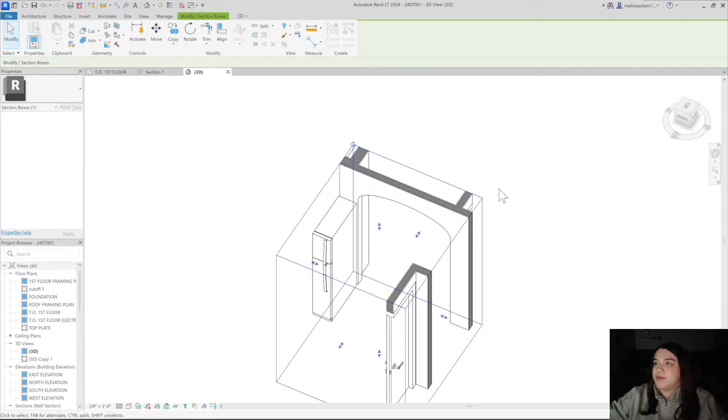So if I go to this section, this is really where I was exploring the idea of doing a faux cathedral within this space, and then also doing like a vaulted entryway. So if I take a section box, I can look at this space in 3D and crop to it. So this whole entry space, I was also considering doing like a complete vaulted ceiling, not circular, but an arched ceiling in this entire entryway.

If we go back to this section, this is 6 feet over here, so this is complete space that could be finished. It also could be unfinished. So we're definitely probably going to have two plan options with this one. We're going to have one plan option where it's not a cathedral ceiling, it's just a flat ceiling, and all of this is just attic space with an attic drop down like over here.

In our mid-tier higher level stock plan, for people who are looking for more square footage and a little bit more of a high-end finished look, we will be including the cathedral ceiling as a touch. We'll be including the finished area on the second floor, and we'll be adding stairs over here. So that's just a little bit about our thought process.

This will be the first stock floor plan that we complete and bring to life, the first one that will be on our website. I'm really hoping in a few months that once we get things up and going with the residential design and offering our design services and our stock plans, that we're able to bring in some cash flow and we can actually purchase Lumion. I love Lumion. I've used it at all my past jobs.

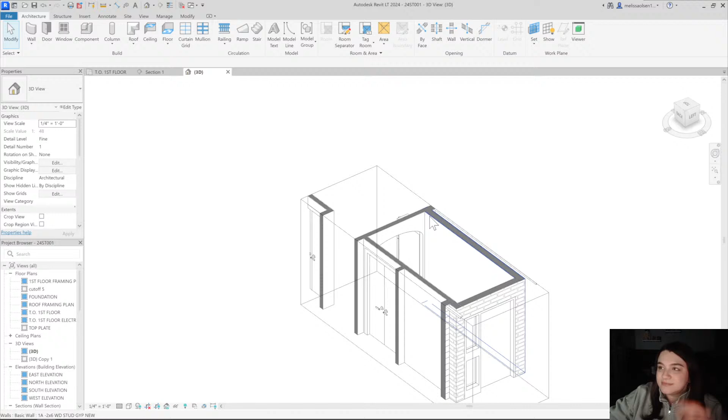Now your girl's on her own, so she's gotta pick and choose the programs here. So it hasn't been top priority, but I definitely would love to get our stock plans rendered in Lumion eventually when we are there in our process of just developing, honestly, everything. It's one step at a time. So this is what we are working with right now.

It really took a long time last week with the dormer because I really was intentional with this section. I sent out in my newsletter a little bit of a breakdown about last week's Model with Mel, just because I wanted it to be not just let's throw this dormer on and now you know how to do a dormer in Revit. I took you through the actual step-by-step of here is my thought process when I'm creating roofs and creating dormers. It's not just let's throw a dormer here.

What can the space be? And you really have to take a section and look at it and understand it in this way. Revit is invaluable to me just by the fact that I can draw something and immediately see a section of it and start manipulating it in section, in 3D, and all of those ways, because you really just get a feel and understanding for the design and any potential design issues or conflicts.

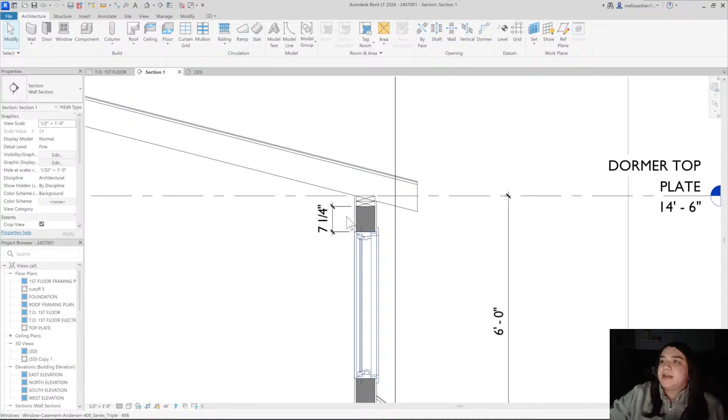And while I was doing this and I took the section, it really allowed me to see, oh, this could be a perfect opportunity for a faux cathedral in this ceiling, really elevate the space. Possible skylights to kitchen. I write notes to myself during design. So this is a whole process, making sure the windows are going to fit, making sure there's enough room for a header, placing our top plates to make sure that what we're doing is indeed going to be buildable.

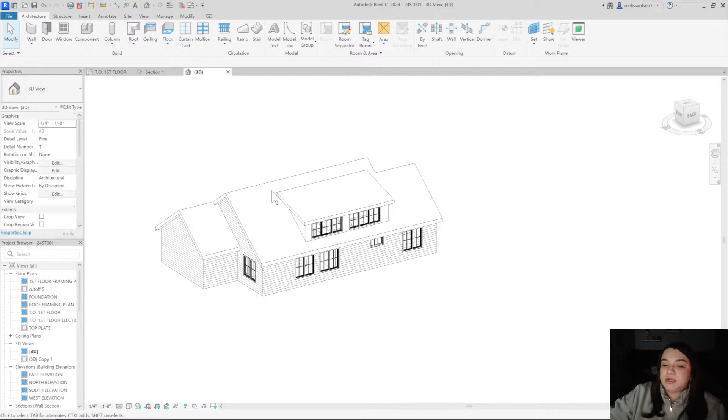I don't like to necessarily design something unless I know it's going to be able to be constructed. That's just the way that I have been taught, to always be thinking about what is this actually going to look like when it's built. I think that having a basic understanding of wood frame construction is so crucial when you are using Revit, just because there's so much that we want to bring to life within this program, and the more we understand, the more accurate it can be.

So I think what I'm going to do is I'm going to go around and I'm going to place some windows. Which ones are these? I can't even really see. They look like picture windows. Casement. They're casement windows, which means that they open from the side, which I don't mind. I'm trying to decide if I want to add any mullions or anything. These are 4-8 by 5. So they're 4-8 tall and 5 wide because they're doubles.

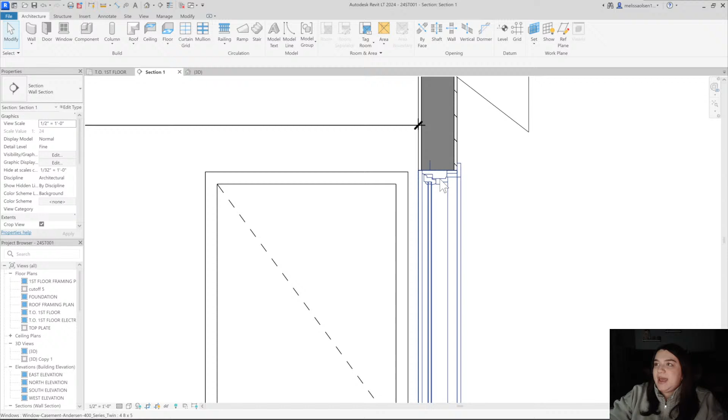I don't think I really necessarily placed a height. So the sill height's around 2.2. And actually the head of the window is matching where the head of the door is. So it ended up working out pretty successfully in where I placed these. I'm just going to click on a few of them, and all the sill heights are set to be the same here. And I'm pretty sure when I aligned this in elevation.

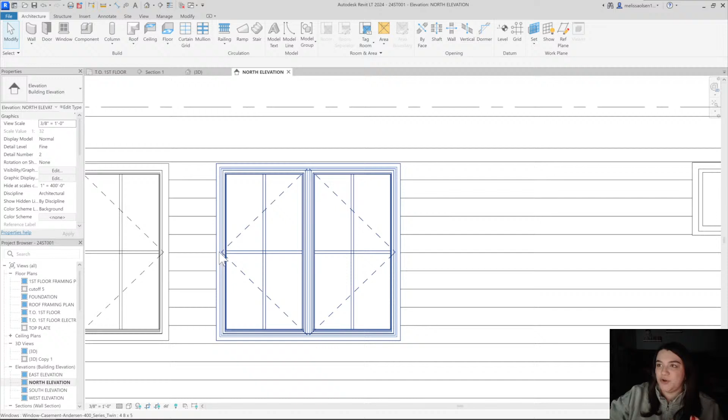I'm going to just select the elevation. And I just want to make sure that I'm doing what I need to do for these windows. So we're going to put a window here in the bathroom, and we have it centered on this window. And then this triple window should be centered on this double window, which it is. And you can see when we're in our 2D elevation that we can start to see these dashed lines, and that represents how it's going to open. So the hinge is on the side where the lines meet, and then this is the way that it opens.

When we're in 3D, obviously we don't see that. It's a 2D depiction that's available for us. And then over here I changed the detail level to coarse, so you can see that if I change it to be coarse, it just shows less and less detail. This is called your detail level, and I always like it to be set to fine, just so that we're seeing as much of the true elements as we can. You'll notice that when I switched to medium, these mullions just became 2D lines instead of showing up like a physical property with a thickness to it.

I want to see if I have casement set up. So these are from the Andersen Windows website. It's a window and door company. You could just Google them. They have a whole BIM library.

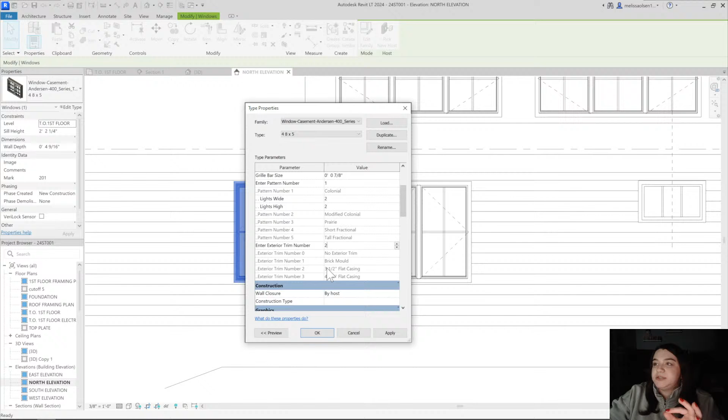It's where I have all of my windows downloaded and saved from because they're phenomenal families to work with, and they have just so many windows and doors and all of these things. So here you can actually select an exterior trim number. So right now they don't have any trim assigned to them. I'm going to automatically go in and add trim to them. I'm going to pick number 2. I'm going to do the 3.5 flat casing. So I'm going to hit OK, and what's going to happen is it's going to go through, it's going to change all of the windows throughout the entire project and add casing to them.

Before I was using Andersen Windows, before I really knew processes and things that worked well, I was modeling casing with like a wall, like cutting out the wall and making it trim, or I was modeling it in place as an element and then kind of like applying it or attaching it to the wall as a wall-based element, which was a whole process to create, and it worked for what I needed it to do.

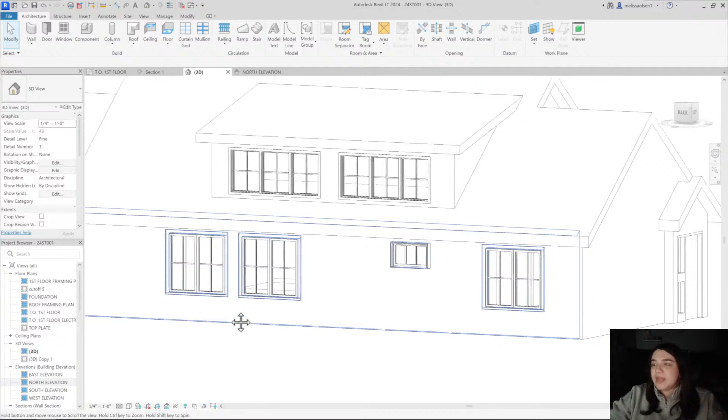But once I started using Andersen Windows and was able to look at the capabilities that the families offer you, it has changed the game for me. It's made a lot of things easier with windows and doors, just the casement thing alone, the ability to change all these mullions. So I do like the way this looks traditionally, but I think I'm going to go for a little bit of something different. I want to switch it up.

You can change the grille bar size. You can enter in the pattern number and then lights wide, lights high. So right now it's set to colonial, which is just the standard, you know, down the center over, and we're doing 2x2. So if we upped this, we could do 4x4. I'm just going to hit apply so we can just see what that's changing.

It's going to divide the, I got a piece of hair on my hands.

It's going to divide the windows into 4x4s. Yeah, see, so 4 this way and 4 this way. That's what this means. And I'm going to put this back. I'm going to put this to 2 again. I'm going to change the pattern number. A modified colonial. So let's just go through some of these different types.

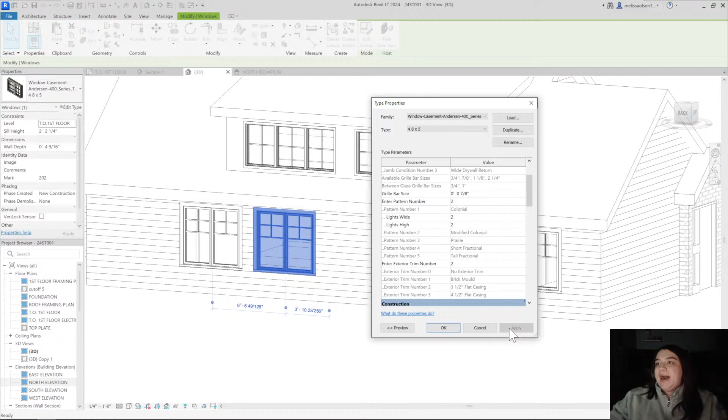We started off with colonial. We are now going to see what a modified colonial looks like. It does take a little bit of time for Revit to think through these changes. So modified colonial is just the top half. And we're going to see what prairie is.

There's all of these different terminologies that we don't even realize exist within architecture. Like colonial, modified colonial, prairie, short fractional, tall fractional. I had never heard any of these terms before working in practice. So if you don't know or have never heard these terms before, do not fret. It's normal. You will learn these things as you go.

So this is prairie. I want to see what short fractional and tall fractional is, and then we'll pick one and we'll move on. I thought I would like prairie, but I don't know if I do. And I don't know if prairie would necessarily work with a 1x1. I'm not really sure. I don't think it would, but so short fractional is just a little bit of mullions at the top,

and for the last one, we're going to see what tall fractional is for this window family. Tall fractional, I'm assuming, is just going to be a taller version of this. Again, if you've never heard these terms before to describe windows, you're not alone. So modified colonial and tall fractional are pretty similar. Tall fractional, they just don't have like a double horizontal bar.

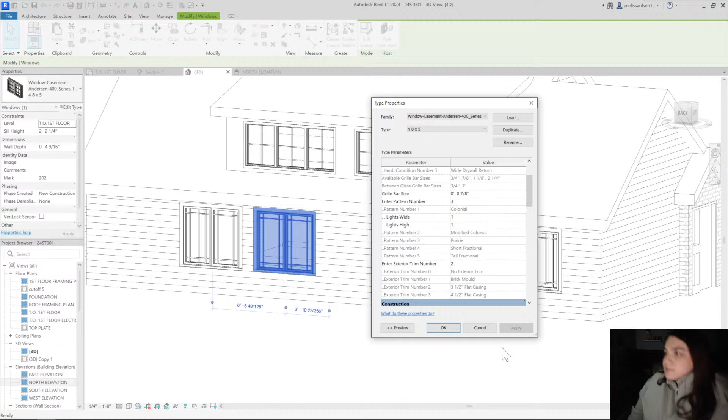What I'm going to do for this project, I think I want to try prairie, but I want to see what it looks like if it's just one. I don't even really know if that's possible. I will just test out different things, see how they look, see how they feel. This is all part of the process for me. I didn't think that the prairie was going to change with only one, and it didn't. I thought I was going to want to do prairie, but I don't want to do prairie. I'm gonna change it back to...

I'm actually thinking I want to do something different for this. I always do colonial, it's like a habit. So I feel like I want to try modified colonial.

I'm going to change this. If I keep it at 1, I think it's still going to do 2. I always get a little confused on what it's actually going to show up as, if one of these things is even a possibility. Like here with the prairie, it gave us the option of doing 1, but it didn't actually produce 1. So this one is just horizontal lines, which actually does make sense.

It's interesting that the dash lines actually changed. I didn't realize we were in 3D before, so I didn't know that was changing. I don't really know why that's happening. So for modified colonial, I'm going to put the 2 lights back in again. I'm just going to take a look at how that looks and feels.

It just feels like too busy with this. There was a third option we did, short fractional or tall fractional. I think I want to try tall fractional just because it's similar to this, but it felt like there was a little bit less going on up above.

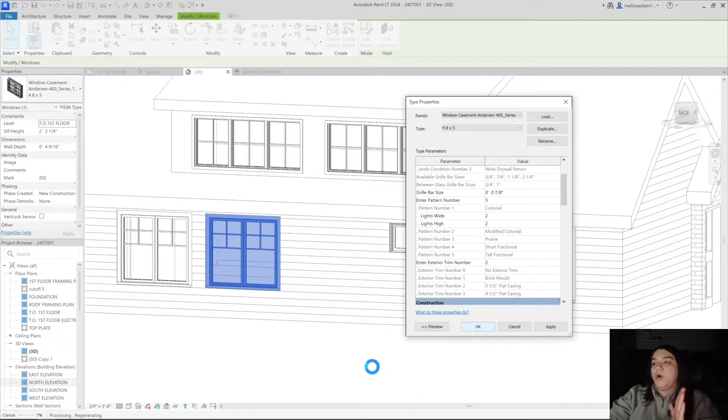I think it's just like 1 vertical, 1 horizontal for the fractional. And I think I definitely like this the best.

I feel like these windows are so big that breaking them up with this type of grill pattern works really well. It also feels like it's working really well with this grill pattern on this window in the bathroom. And up here as well, because these are smaller windows, they just have the full cross mullion, whatever you want to call it, the colonial mullion. So definitely going to keep that.

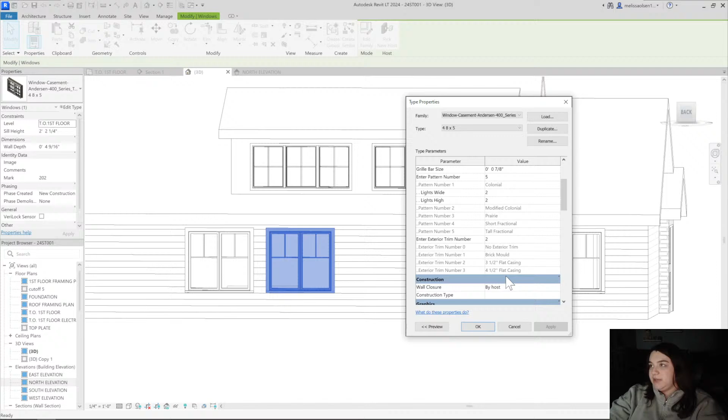I don't know why when I changed it, it went from being a middle center hinge to an up above hinge. I wonder if I change it back to colonial, if that will affect those 2D lines. I'm just curious, I'm going to keep it as it is now, but I'm curious how those detail lines, the dashed lines, change. Yeah, so it does change them, which is pretty interesting to me.

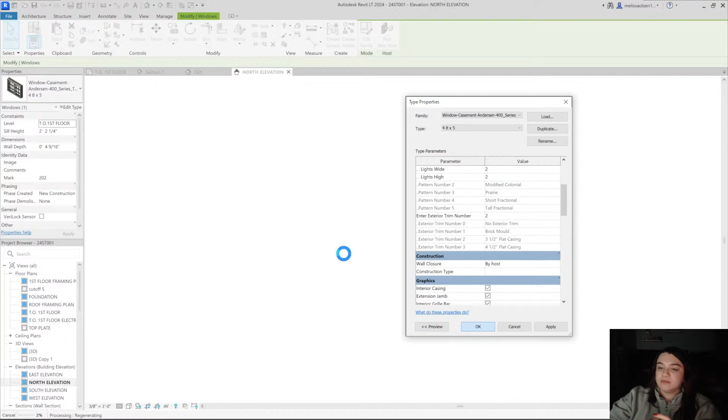I'm just going to change this back to tall fractional. And it's all right that the 2D line's changing, I'm really going to be focused on this in 3D anyways, so it'll be okay. An error occurred.

Cancel. Interesting that an error occurred. Okay, we're going to enter in the pattern number again. We're going to do 5, 5. I don't really know why it's not working.

Alright, so it did change. Again, those 2D lines look a little bit funky in 2D. Honestly, I could just change the family, it's probably just something within the family that's broken or not right, but it's fine. We're going to look at it in 3D. It looks beautiful, so we're going to keep going.

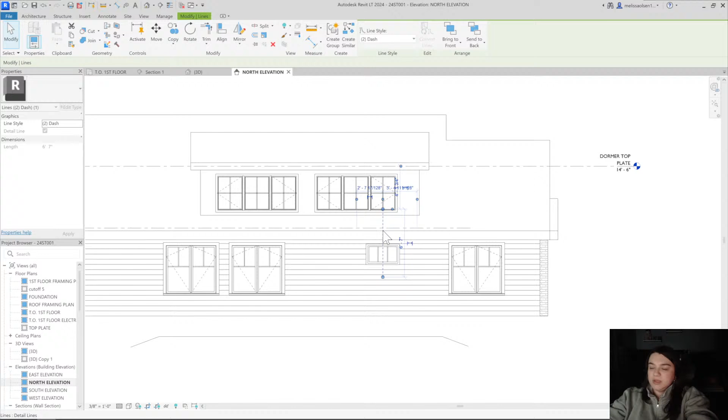I want to develop this roof. I think I want this to be metal and the rest to be shingle.

Let's finish placing some windows though, because I feel like I'm just all over the place. So I need to figure out where else I want some windows. Let's go to some window families.

I want to do a triple, so I'm going to type in triple. I have Casement Andersen triple, a 10x6. I could just change it if I want to, but I'm just going to plop it in, see how it looks. This is like a big living room space, so I feel like I definitely want something centered here. For sure.

Yeah, so the sill height obviously needs to match 2, 2 1/4, so I'm just going to copy that over there. I'm going to copy that over here. Ooh, this should be 2 feet. All right.

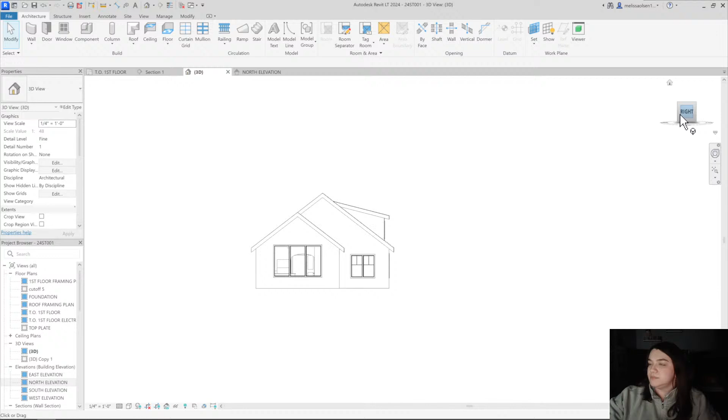So this is just in general a taller window. The sill height is in fact the same, but the head height is obviously going to be different because this is a 10-foot wide by 6-foot 6 tall window. I do really like the tall window here because this feels like a separate element.

There is going to be mullions on this, so let's go in and add those. Let's add the trim, number 2. Let's go up here, add some lights. Let's do 2 by 2, and let's set this to tall fractional.

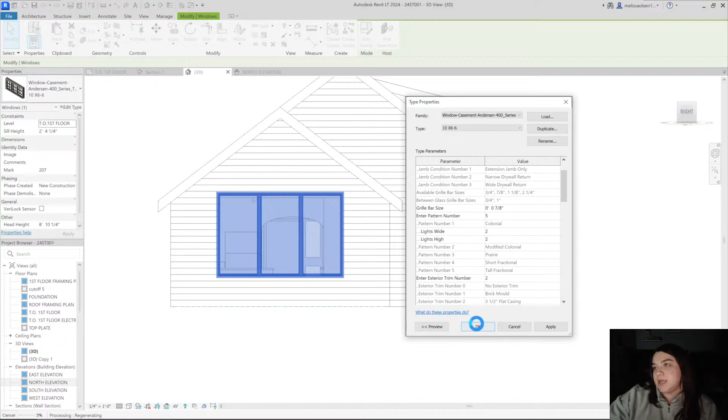Some of the projects, I feel like if they're more modern, they require the clean, normal look. It really just determines the style of the building, the aesthetic you're trying to go for. And I feel like windows are one of those things that you can even ask the client per project, hey, what window type do you prefer? Do you like this? Do you not like this? And they can make a decision themselves at that point on what style window they prefer.

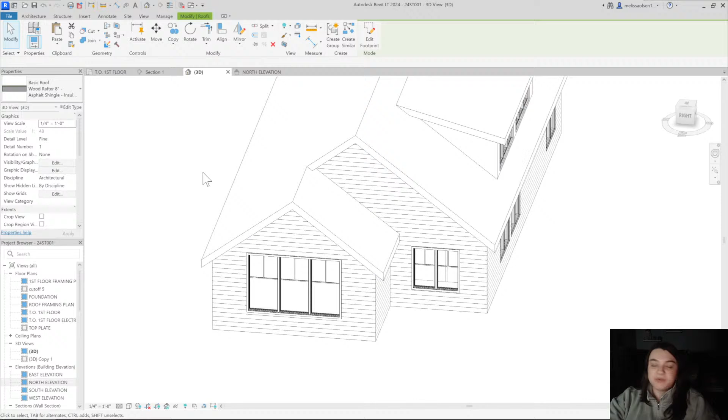So this would be a perfect opportunity in this space to have its own cathedral moment, a true cathedral, where we are actually framing the ceiling to the roof rafters. I'm calling this a faux cathedral because one side of the cathedral in the kitchen would be taking the angle of the overall roof rafter on the left, but on the right we would create a faux rafter on the inside to create the faux cathedral look. I hope that distinction makes sense. This is like a true cathedral space, whereas on the inside it would be a faux cathedral.

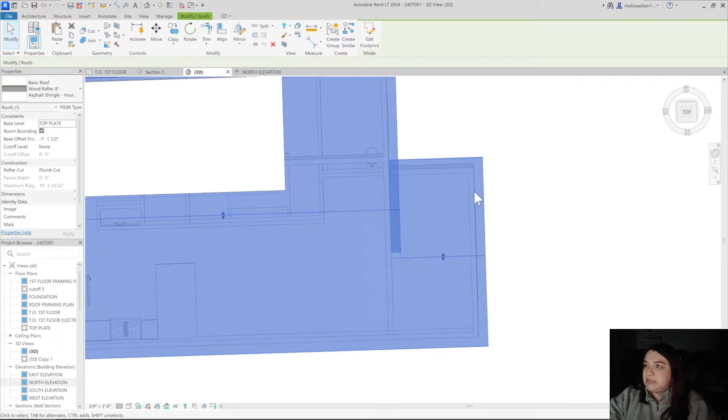I will definitely have to investigate the interior space. We don't have any floors in right now, so it might be a little hard to see. But I think it could be interesting to have a faux cathedral over here and maybe stop past the dining room chairs, so when you first enter it opens into that cathedral ceiling, then flat ceiling, flat ceiling, flat ceiling, and then it opens up into a cathedral ceiling. It might be a little awkward though, because this whole space is like living room and this would just be a cathedral, so it might not be worth it. I also feel like having more than one cathedral ceiling space in this area would take away from the cathedral itself, having two of them. One feels more intentional, but there's definitely two different options for the location.

Like I said, the kitchen is where I'm going to put it, but you could also put it down here, and maybe even this part would be a true cathedral and then you extend it back to this portion so the space actually feels like a dedicated living room space. If I were to put a dashed line here and change this ceiling into cathedral, I feel like that ceiling change alone really allows a space to feel different even though it's one room and it's open concept.

A lot of open concept plans feel really inviting and they're really popular. A way for you to distinguish the spaces and zones of the house is to really utilize the ceilings. I feel like a lot of times in design, especially residential projects, we're not always thinking about the ceilings, we're not always thinking in section. So that's something I always want to be doing.

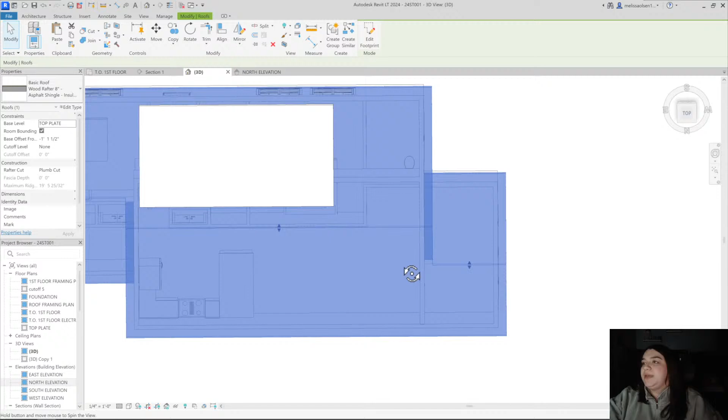I feel like it could be a really good opportunity to have a cathedral ceiling in this whole area, if we go back to the floor plan, to distinguish the two areas - distinguify, that's not a word. I also feel like it could still be a really good idea to have that cathedral on this side. I do want to finish placing the windows. I do feel like this mass feels good having the head height bump up here because it's sort of in its own little world.

So if I go to the first floor plan, I'm just going to go in and add a couple more of these double hungs that we're already using. I want this to be where the dining room is, so I'm going to place a window here in this zone.

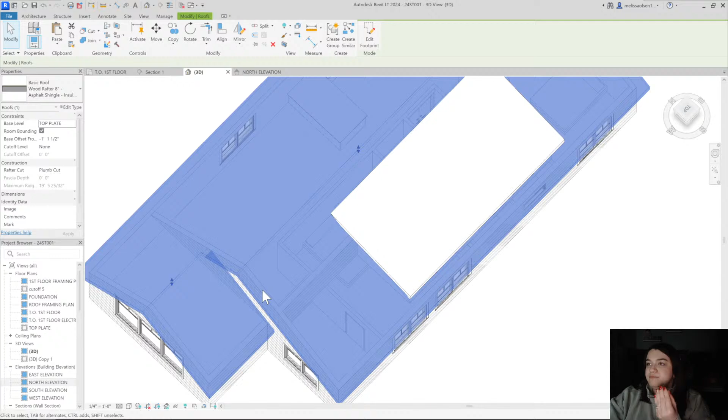One of the things to consider when talking about doing a cathedral for this space is the stairs probably have to be here, so how does that work? If you're going to build the cathedral to this front roof slope and extend that back into the building, like we were talking about doing in the kitchen, how does that work with stairs? It really doesn't, because you're creating a head height down here that you can't get past. So there's a lot to consider. If you're not using the second floor as a finished area and you're just going to use an attic pull down to get up there, perfect - you can make this whole area a cathedral and push it back, because you won't need to put stairs here.

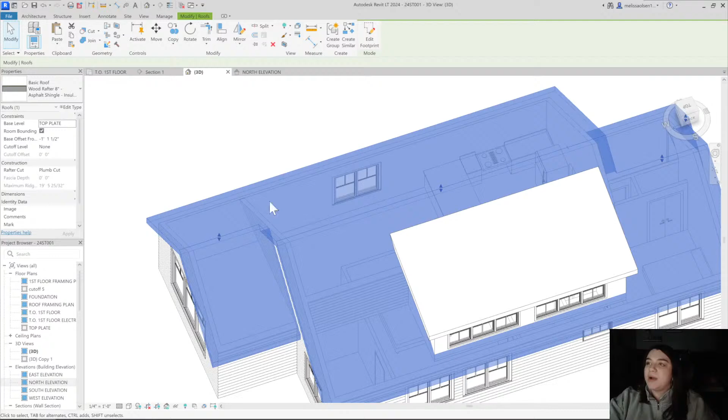But in the event that this is a finished second floor and somebody does want to utilize that, you probably wouldn't want a cathedral ceiling here, because you're going to want the stairs to go up there. And this roof would continue back on the inside.

We'd have those faux rafters to carry the shape of this roof inside here in this space. I hope that makes sense. I know I'm talking in 3D and switching views a lot, but I really like to talk through the design process, what I'm thinking, how I'm visualizing this space on the inside, how I'm thinking if it's going to work.

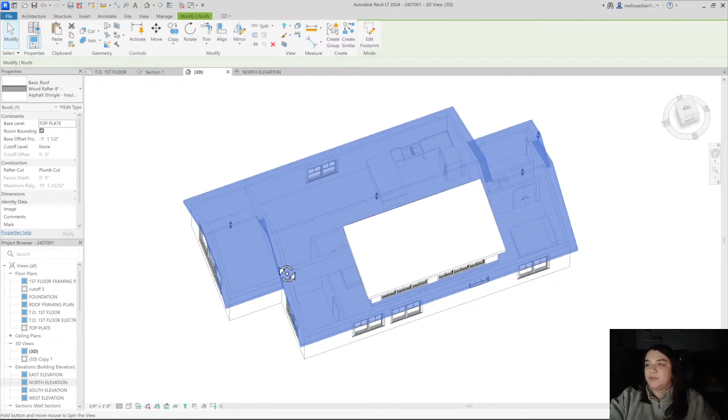There's obviously so many different variables. This isn't for a specific client, so there's no one saying I would prefer this over this. It's just me deciding what I want to do for every project, and also slightly changing some of the projects to make them more affordable or more higher end. So like having a lower, more affordable version of this plan versus more of a higher end, more construction costs to the project, those two options for the same floor plan. There's definitely a lot of different things I can do, and I just have to figure out what the best thing is.

I think I'm going to place 2 windows here in this space.

I gotta flip all these windows because they are not showing the casing on the outside. So I'm just flipping all the windows with the little arrow. The casing's right here on the outside.

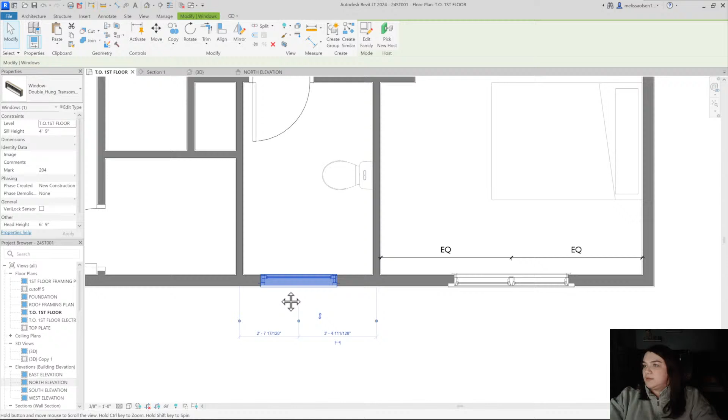This one I don't think has casing, so let's just go in and add that to this. Okay, this is a little bit different. Flat casing for this one's number 5. So we're just gonna update that there.

We're definitely going to want a window by the sink. So I'm going to do create similar, but I'm also going to pick a different one.

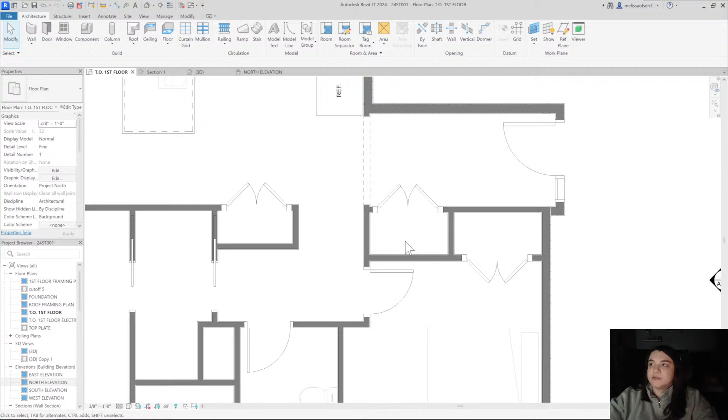So the range is actually here. The sink is here. That's something that changed in the floor plan since I talked to Emily. We also changed around this. This is a closet for this room. This is a closet for when you walk in.

I'm not entirely sure again what we're going to do with this space. If we're going to keep this we're gonna make a sort of division here. I'm just using this right now as a guideline, as a reference for this, to divide this space, but I'm not sure if it's gonna be a cathedral ceiling. I don't really know what I think right now. I think I just need to model some stairs and see how that's gonna look.

So I have to put in a second floor here. I'm gonna put in a floor so I can create a finished floor height and I can get some stairs. Do I want to do that? Or do I want to work on the exterior? So many different things I can do right now. I feel like the exterior should be my top priority.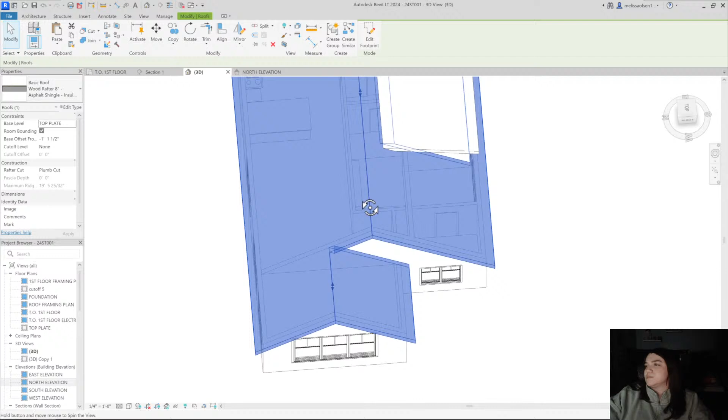I don't really picture stairs going anywhere else. I feel like they really do have to be here in this corner. So I don't really think a full cathedral works unless I knock out a space here, but then that kind of looks weird.

Maybe we could just do like a coffered ceiling in there. I don't know. Because this is definitely higher up than the other one, so the ceiling is probably going to have to be higher on this side. But it's alright.

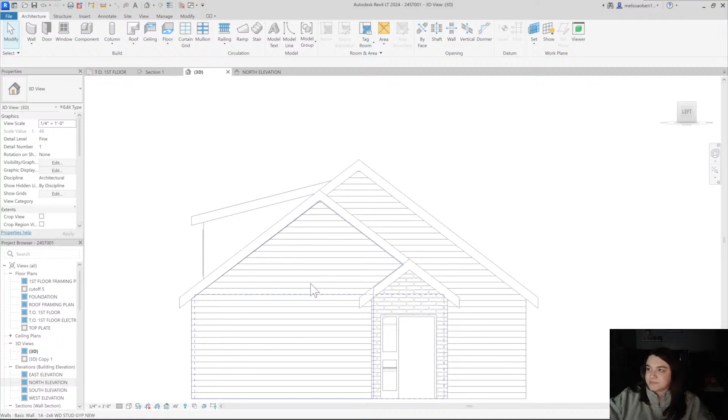I feel like this could be cute with like a circular element here. You know, I do kind of like the brick. This was supposed to be a stone hatch pattern, but I had it saved as a brick hatch pattern, which is fine. I actually kind of like it.

And then I don't think there's really any more room for windows here. I'm gonna try and center this within this area. Oops, moved my design line. No. Alright, so that's good enough.

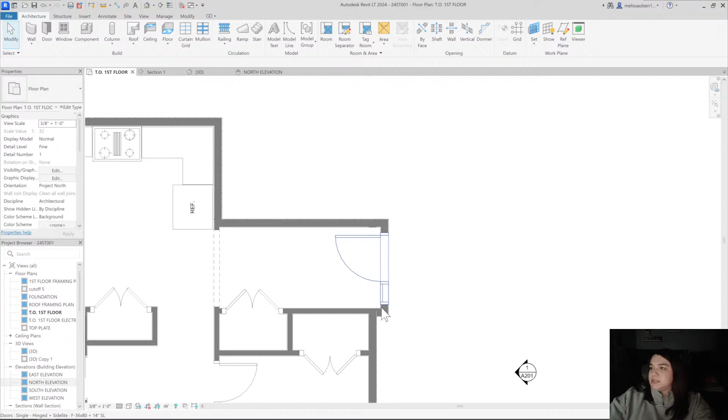I want this to come out more, so I'm going to move this out more. I'm going to move it out 2 feet. I'm also going to move this out 2 feet. There could be like a little nook or a bench in here. I wanted this to feel bigger, more like an entrance.

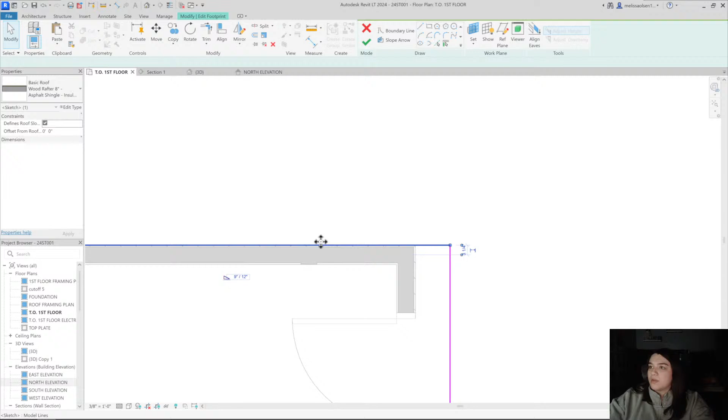So let's go in and fix up some of these roof issues. Let's move this out. I always want it to be 1 foot off of the stud because I'm always measuring from the pieces of wood.

I don't know how this got so moved out. Okay, so that is fixed. I do have to fix the walls a little bit, but I definitely do feel like that feels much better. Sticking out more, there's more, it's more of an entrance. I'm just gonna change this.

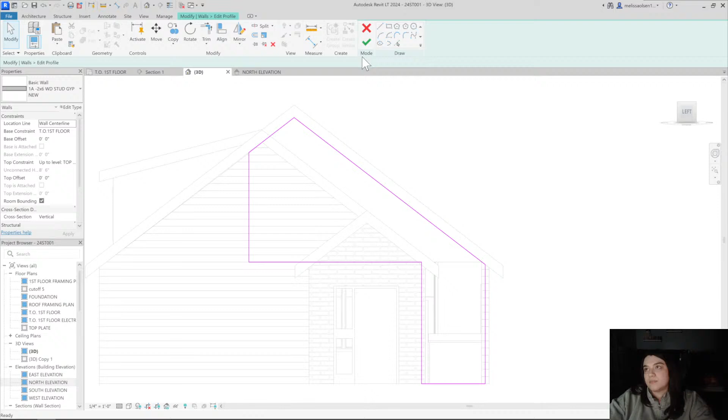Oh, it messed up my roof over here? That's weird. I must have moved the whole roof by accident. Okay.

So let me go to the first floor and edit this footprint. I must have moved this whole thing by accident. I just gotta pop in here real quick and fix this. That's why it was off by like 3 feet. I was like, what is happening?

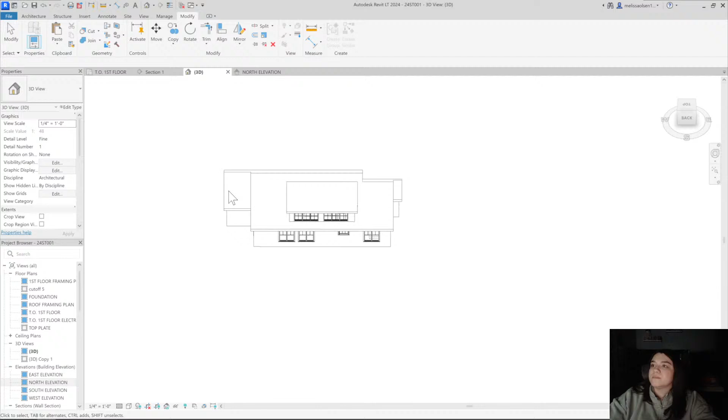Alright, so I want to do a circular window up here. I feel like maybe it just needs a circular window. This is a picture window, but it feels kind of ugly. I'm actually trying to see if I have any better doors. This door's kind of ugly. I think I could definitely have a better looking front door here.

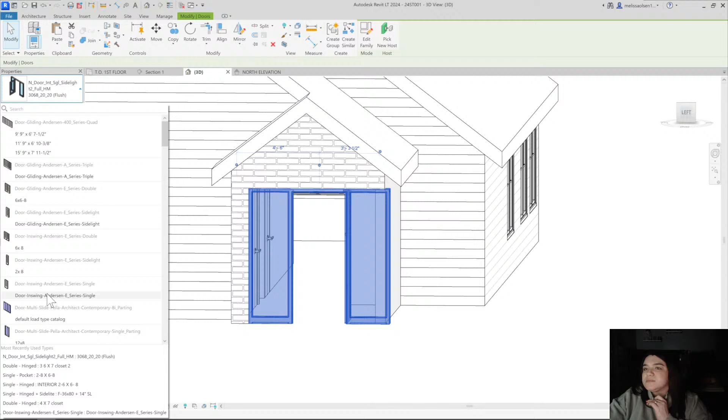We have one with a double gliding E-series in swing. Alright, so let's do something a little more attractive. Let's put this here.

I'm gonna grab some side lights. I just want to make sure this was 3 feet. 3 feet by 6'8", perfect. I also think this could be like 2.

So the side lights from Andersen are actually loaded into the door family, so I'm in the door family popping in some side lights for this door.

I think I'm gonna make this 1'6". It's 2 feet right now. Okay, 1'6", and the height is set to 8 feet. So we're gonna change that to 6'8", and we're gonna just rename this to 1'6" by 6'8".

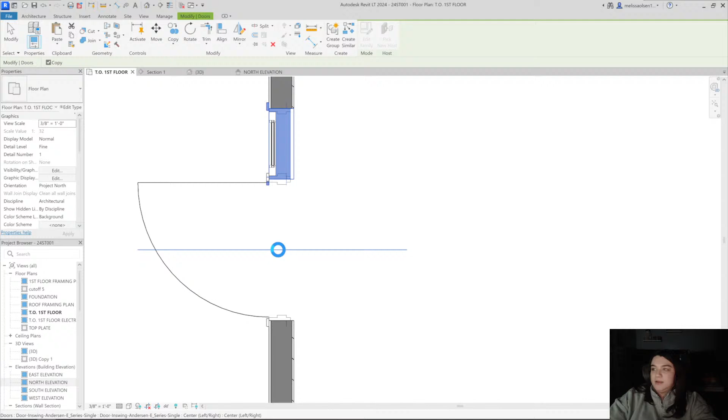Okay, and then in plan I'm gonna just physically move this there, and then I'm gonna do MM, and mirror it on the center, and then we're gonna have a perfect side light on the other side.

I'm gonna do a little detail line here, just to show a bench area. A little bench, a little sitting bench. Take your shoes off, take your coat off, put it in the closet.

Alright, so I think I'm going to try and do the same tall fractional. Craftsman, that's random. So, Craftsman I don't think was an option before. Traditional top light only, we could try that. Pattern number 2. So now these side light pattern numbers and names are a little bit different than what we were looking at with the windows before.

Traditional top light only doesn't seem to have changed anything. I want to see what Craftsman is, because I have an idea of what the prairie is going to look like. I don't know what prairie top light only is. Maybe we should look at what that is.

Okay, so Craftsman is like this, the tall fractional thing that we kind of have going on. It is definitely a little shorter than I'd like it to be, though.

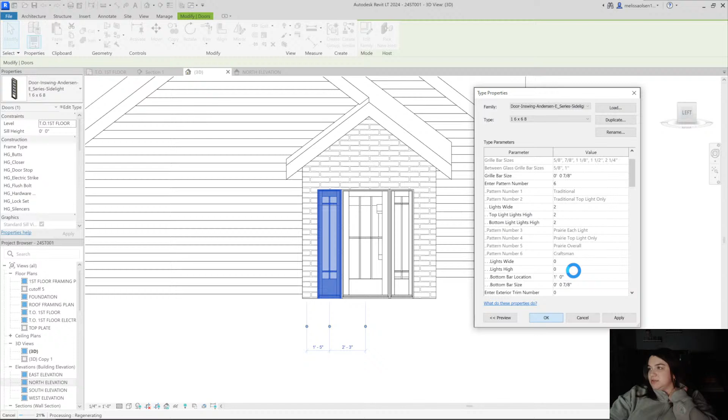Let's see what prairie top light only looks like. Also not really feeling that, so I think I'm gonna go back to 6. And I don't think I can make it longer. It doesn't really look like there's any way to control where that falls. But I'm gonna keep it like that for now.

I want to see what traditional top light only looks like. Show me what traditional top light only means. Nothing. Nothing.

Alright, well I definitely want this to be 2x2. I don't want 3, it's too busy. 2. Pattern number... Craftsman, let's see what that looks like.

Honestly, for the front door, I think I just might want 0. Like traditional, like nothing, like 1. Yeah, I feel like that probably looks the best, honestly. I think I could try and change the panel here.

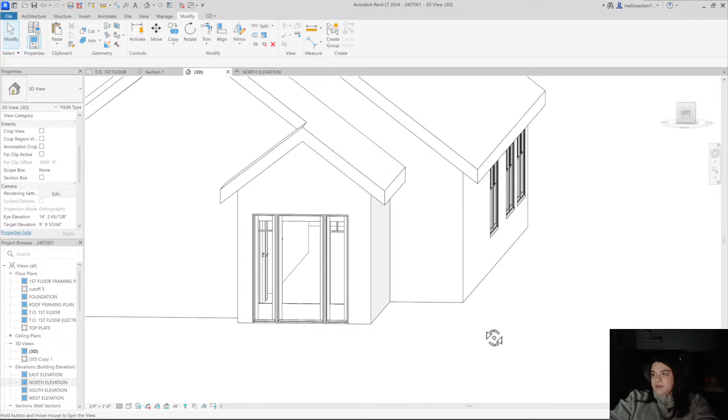Okay, well that just changes the side frame. So I'm just gonna remove this, make it 1, 1, 1. I don't want there to be any bars on these. I want a clean front entry. So, readjust my position in my chair.

Alright, maybe I have to just put 0 here. 0, 0, 0.

What? Didn't let me take it away?

Where'd my music go? I need my ambiance. Okay, well, let's just try to change it to prairie. I don't want there to be lights.

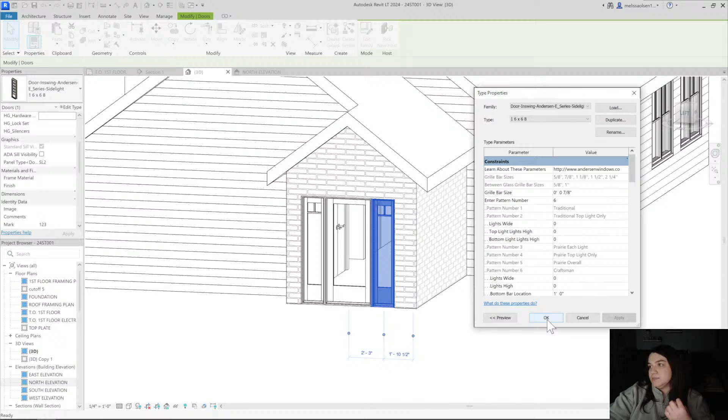Alright, so it's not allowing me to just have like a plain side light. So I'm just going to change the side light family. I don't know if it's just the family that's being tricky, so I'm just going to swap this one out. It's obviously way bigger than I need it to be, but I'm just going to try and make it a clear one and see what happens here before I bother adjusting it to be the size I need it to be.

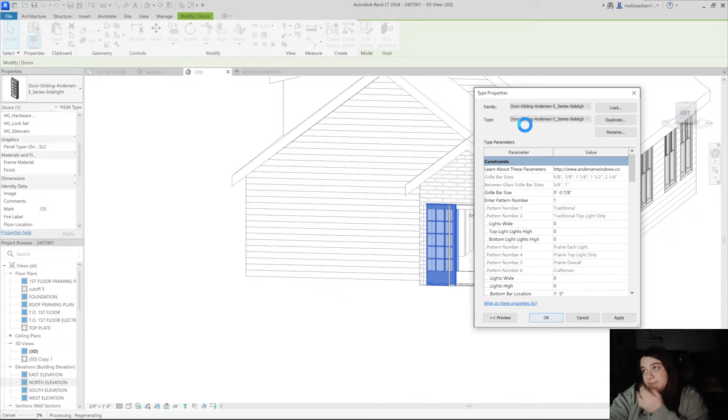So really these side lights are for different types of doors in the Andersen family world here, but for us it doesn't really matter. So this side light is working the way that I'd like it to work. So I'm just going to rename it and resize it. So 1'6" by 6'8". Oops. 1'6" by 6'8". Okay. So I just want all to be clear. I really do like this brick pattern, so I think I'm just going to keep it.

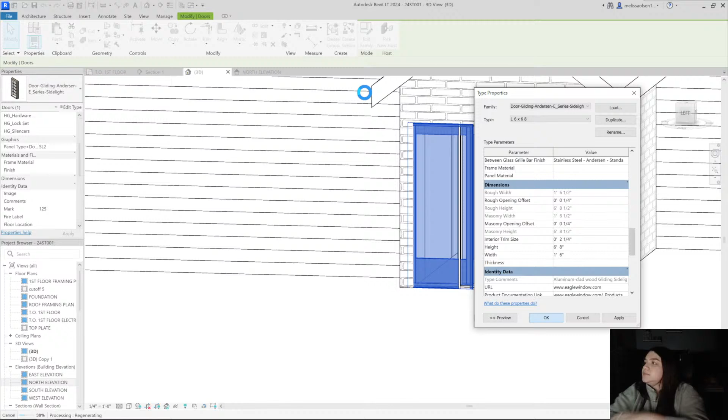I don't know. What do you guys think? Should I try and change it? I can look at some hatch patterns on a website and then load them in. We could do that, or we could just keep it for now.

So interesting. When I made it smaller, this showed up. So I wonder if I make it like 2 feet, if it'll go away. Why is it that when I make the width smaller, Andersen windows, I get a mullion? When if it's wider, I don't get a mullion. I need answers. See? Interesting. I need some answers, Andersen windows.

So yeah, I'm just gonna undo all of that because there was no point in doing that. I'm gonna just change this. I'm gonna change it to traditional, and we're just gonna have one line going down the middle of the window. We're gonna call it a day.

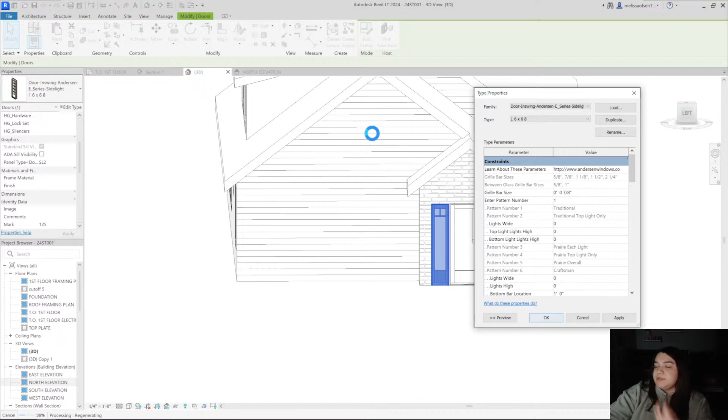I want to start working with this facade. I need this facade to have some life to it. There's no windows on it right now. We need something. I feel like it needs maybe like a circular window. Why is my wall off? Edit profile. Can my walls stay? Pin. Stay. Alright, let's look at some windows. Let's see if I have a circular one. I do. Oh. Little tiny one. Kind of looks cute.

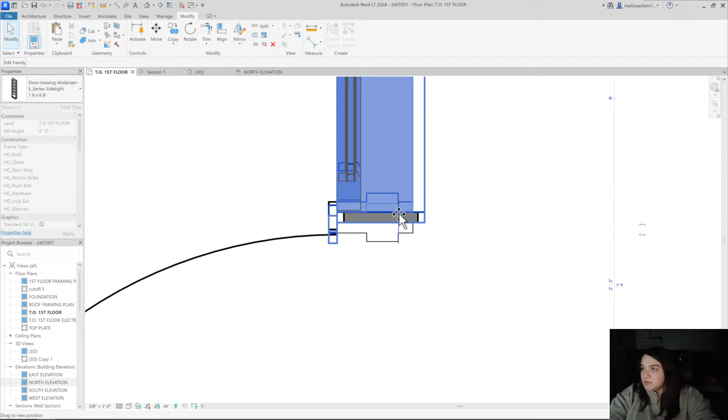Too bad this door is not centered right now, so let me go back to the first floor. Yeah, because if the door's not centered on the peak, it's not going to look good. So I probably should have done that before. I could have aligned them, but I'm just dragging it and snapping it. Alright. I feel like, honestly, a 24-inch diameter looks pretty good. We could make it a 36. That looks way too big. So let's pop it back down.

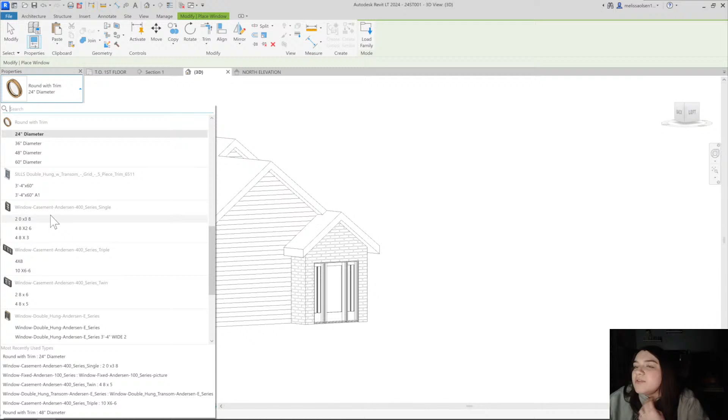Do I feel like this one needs lines through it? Kind of. Do I also feel like it doesn't really fit there? Kind of. So I'm going to remove it. And I'm going to do just a smaller square window, picture window, or a casement window. It doesn't really matter. You can use whatever family, really, and then you just go in and you can change whatever you want. So, wow, that's a big prairie.

A picture window. The picture window definitely needs to be smaller, but I always place the window because it takes a little bit to load, and then I just manipulate it. So it definitely needs to be square. I'm definitely gonna make it smaller, but I want to do a split face here, and what that means is I'm gonna divide the plane of this wall so I can paint it two different surfaces, basically. I'm gonna do a horizontal piece of trim with the split face.

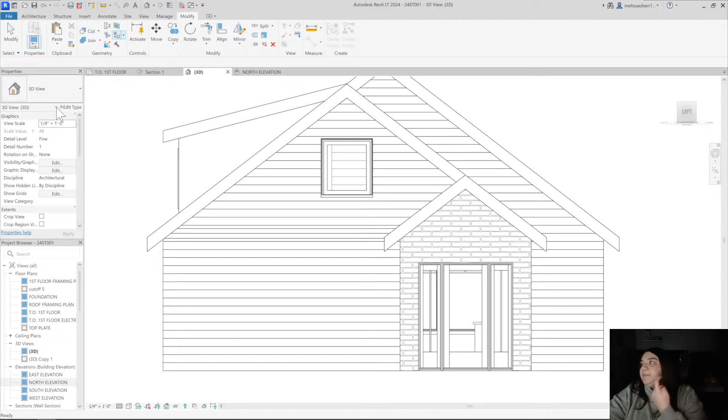So I'm gonna do an offset here. I want my split face to be here. I think the piece of trim can stay here for now. In terms of how it ends up, it might be raised or lowered, but for now I'm going to leave that there. And I'm going to go with the paint tool, and I'm just going to paint this above area and the bottom area white. Alright. And then I'm going to go in here, I'm going to change this picture window. Casement might...

See, so this is just a shape change, obviously, for the casement window. I don't love the way that looks. I'm just looking at different sizes, different proportions. I just made it a little bit bigger. Yeah.

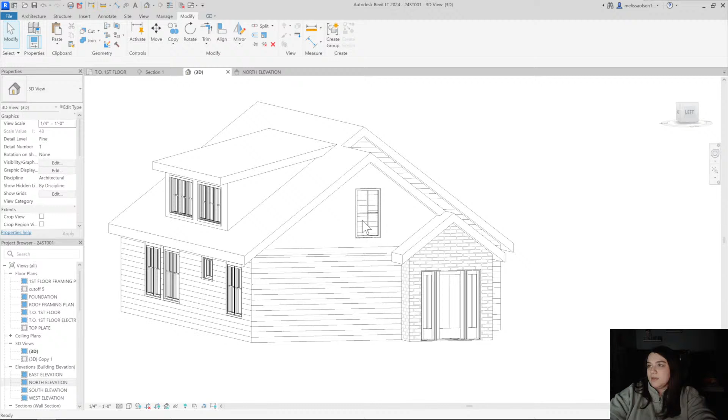Definitely feels weird. So whatever the proportion of this is, 4 by 8, so 4 high, and then 8 feet divided by 3, I don't know what that ends up working out to be, but I think I'm going to take one of these windows and put it here. So I'm going to duplicate this, and I'm gonna go with 2.8 wide by 4 tall.

I'm gonna keep the pattern the same on the top floor for the windows, just so there's some consistency across the board there. I'm gonna add in the trim, number 2. I'm gonna scroll down here, make this 4, make this 2.8. All right, and I think that looks actually pretty good. It might be a little bit taller, which is weird because it's supposed to be 4 foot.

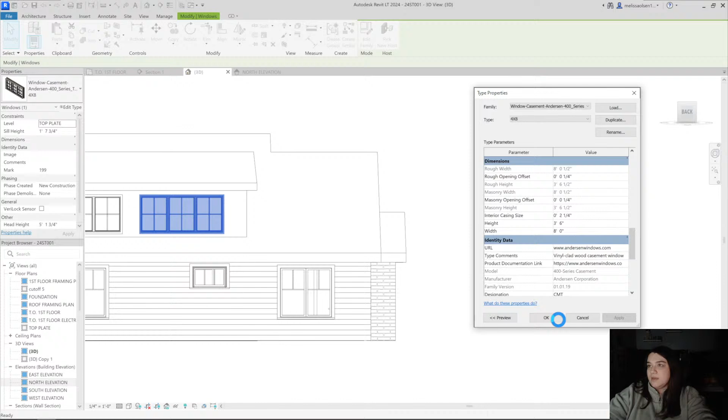Oh, the height is 3'6". See, this is what I'm saying. You go in and you change it. You gotta match the name to what it actually is, because it's easy to lose track of things when you're mislabeling them. And I think I'm gonna make this... I need to look at this in elevation, because I need to make sure it's centered on the peak.

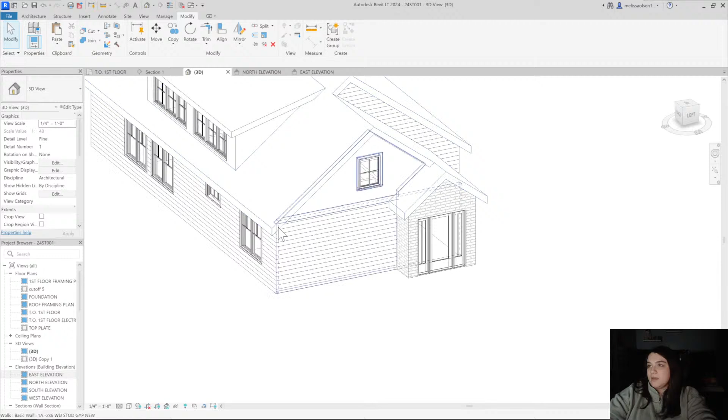Okay. I think I'm gonna add little eaves here and here, and then I'm gonna do some trim across it. So let's go to the roof plan, top plate plan. All right. And let's just draw in a little roof corner over here. I want it to be a hip, so I'm gonna undefine that one, and then we're gonna check it off and see how it looks. We're gonna place it where it needs to be placed. This roof is 8. This roof is also 8 thickness, so I'm just gonna put that at the corner there.

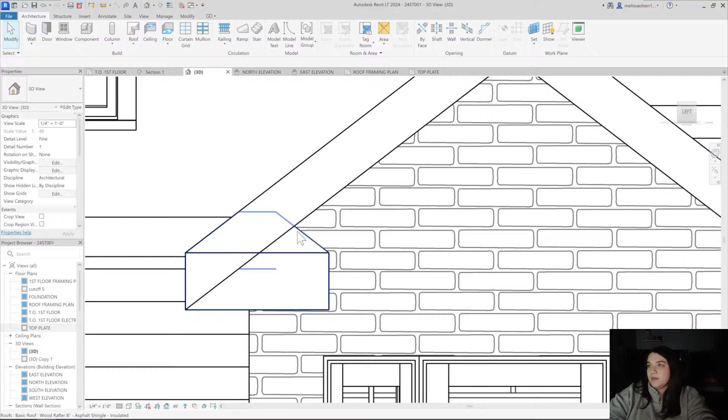And you can see that the more we extend this out, the more of this kind of corner we'll get. So this roof should say what the pitch is, but I don't know why it's not saying what the pitch is. Maybe because the pitches are different. They shouldn't be different though. This pitch is set to be a 9/12. Okay, so this one also should be set. Oh, this is closed. 9/12. So 9/12.

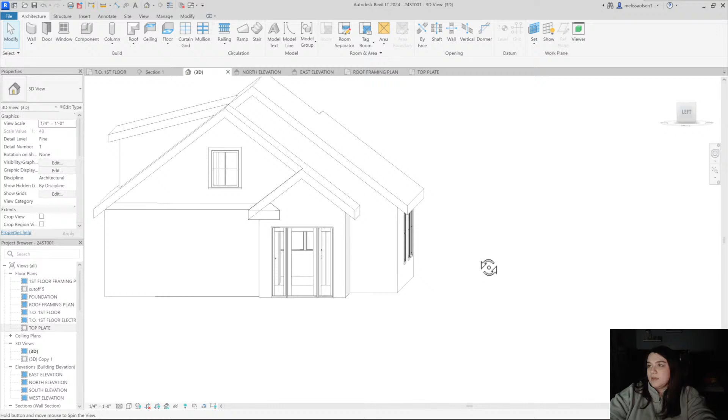I'm just gonna go to the top plate plan. Let's move this over just a little bit. Let's see what it's at. So 2'3". Let's do 3 feet. So, do I feel like it looked better before, or does it look better now? That's the true question. I think it looked better before, with a little tinier portion.

So I'm gonna go back to the top plate. I'm gonna go back in, and this was 2'3". So I think I'm gonna just make it 2'6". So we're gonna just bump it out 3 inches instead of going to 3 feet. I just think that it felt way too big for this space. Now I'm gonna join these geometries, and it's gonna clean it up automatically for me. I'm gonna go to the east elevation.

I'm gonna take this and mirror it along the peak. So I'm gonna draw the axis here, and voila. And then I'm gonna do the same thing. I'm going to take the join command up here, and join this so it's seamless, and then it looks super cute. I'm going to copy this over here. I need to just move it because obviously it's not in the same location. I'm going to change that. So now that I can see where our eaves are aligning to, what I'm going to do is...

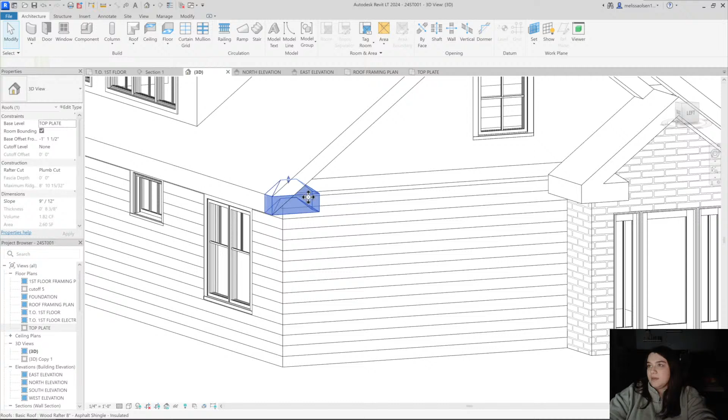So I'm going to join this. I feel like this one we could make bigger, though, just because this is a bigger face in general.

I need to get my phone charger. My phone's going to die, but I've already been streaming for an hour. I feel like time goes by so fast.

Okay, so I'm gonna make this 3'6". I want it to be a full foot out there. Let me see what it looks like. I like it. I almost feel like I need to see what would happen here if this gets smaller.

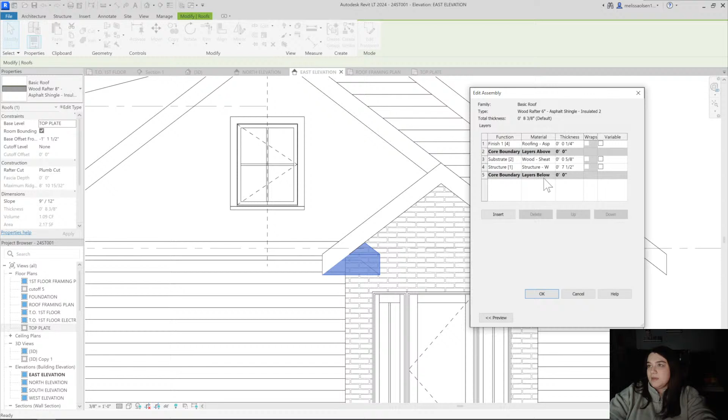So I feel like this could be smaller. So let me duplicate this. And let's just do a 6-inch roof here. So let's just do 5.5 structure. Alright, I do like this way better. I don't think this piece down here needs to be as thick as it was. So I'm also gonna make this less thick as well.

I do feel like we could extend that up if we wanted it to go all the way in the corner, or we could keep it cut off like that there. It's really up to us and what we want to do with the design.

So because this one's joined, I think I can't manipulate it in the same way. When I click on this one, I can move it up and down, whereas for some reason I can't with this one. I think it's just, like I said, because I joined it. So if I unjoin the geometry, yeah, now it will allow me to move it up and down. But I'm just going to undo that because I like it.

So this, on the other hand, I don't love. So I do think I want to have that be a complete eave. I don't think I like that little cutoff portion there. I think I want it to go all the way up to the corner, so I'm just going to drag that. It is going to change the pitch over here. It's going to tell me what it is. It's different on all sides, so if I wanted to know, I could click into it. Oops.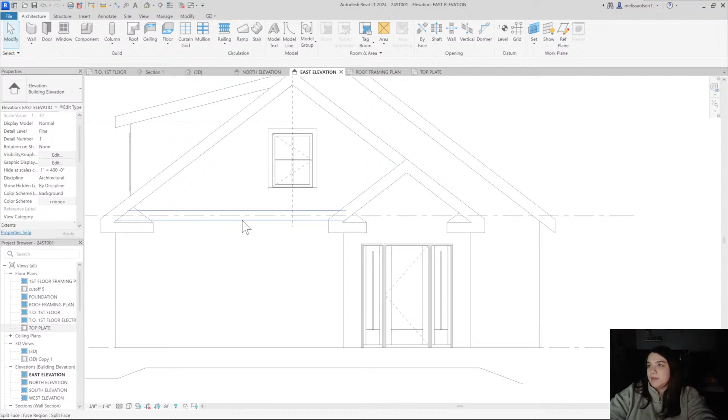I'm just going to join this geometry and this geometry. Cute. And then I'm going to move this split face. So now that I know where my eaves are, I want this to be in alignment with them. So 7.5. Really, it would be 7.25, but I'm just gonna keep it as 7.5. I say that because the nominal wood trim pieces, a 2x8 is a 7.25. But for this, it's okay. I'll let it slide.

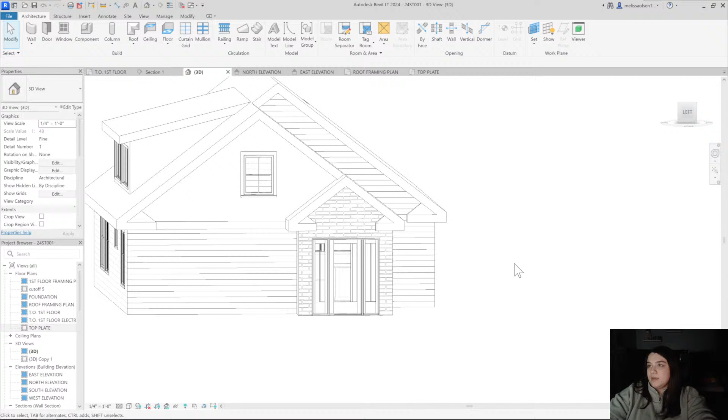Okay, let me copy this over. Let me copy you over and put you in place. Let's bring it back. So I literally just copied that. Bam. Let's do the roof join. Let's do this join tool. So this is joining all geometry, it's not just the roof join tool. All right. So cute. I'm loving this. So that's looking good.

And then here, I think I would do some metal roof. Do I have time for that before my phone dies? I would say let's just do the metal roof real quick. We could do the metal roof pieces. So, I don't even know if I do have a view of the roof. Okay.

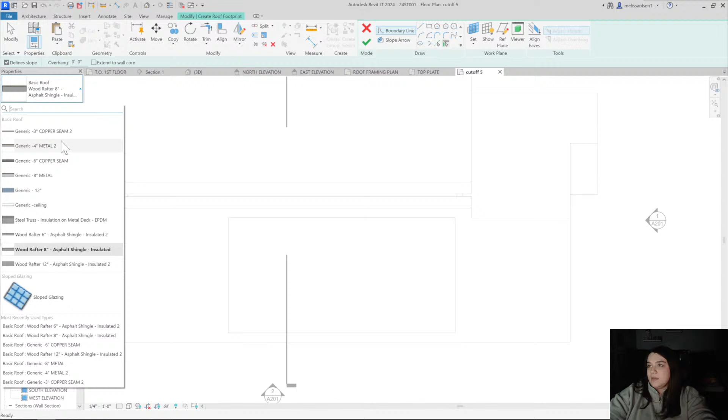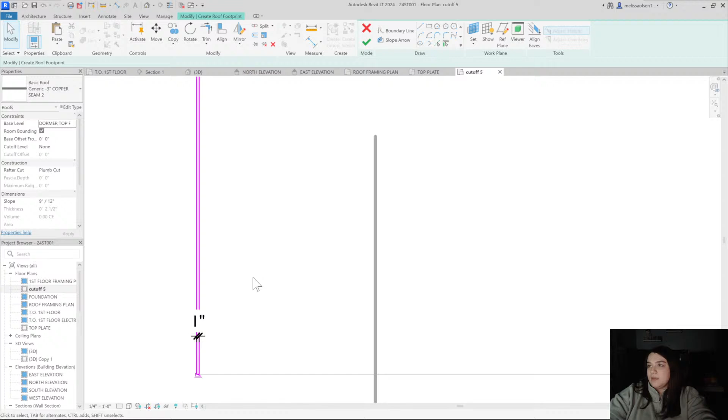Let's go to roof. This is how I create metal seams. So I'm gonna just switch to copper seam. 3 inches is 2.5 inches thick. I'm gonna leave it at a 2.5 inch thickness because that's gonna be the depth of my metal roof ridges. So this will work. I'm going to create one here. I want it to be sloping in the same direction. I'm going to make sure that the outline is 1 inch because that is what I want my metal roof to be.

I'm gonna go here. This is a 3 pitch, so let's go over here and change this to be a 3 pitch. I'm then just gonna look at it from the side. I'm gonna position this right on top. So these ridges will sit right on top of the roof. And I'm going to connect this one by using the roof join tool. So I just click the roof edge. I don't really know if I need to do this. Okay, I do. That looks good.

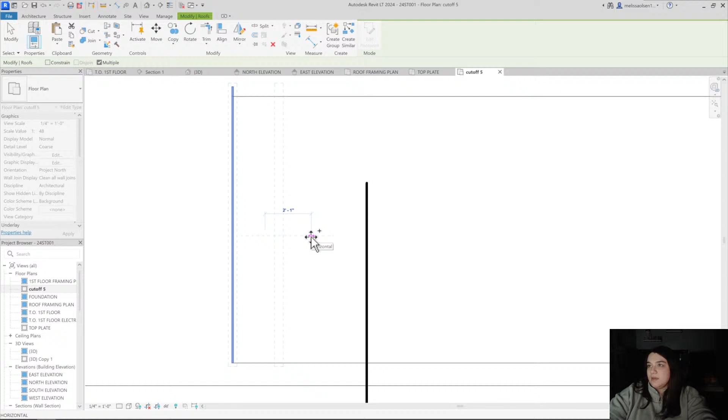So now I'm going to go back to the roof plan and I'm just going to copy this, CO, and I'm going to copy it 1 foot over, 1 foot over, 1 foot over, 1 foot over, 1 foot over. Alright, now I have a few of them, so I'm just going to do a little selection here. I'm going to do CO. I'm going to copy from a base point of that corner. And this is going to copy them over for me faster.

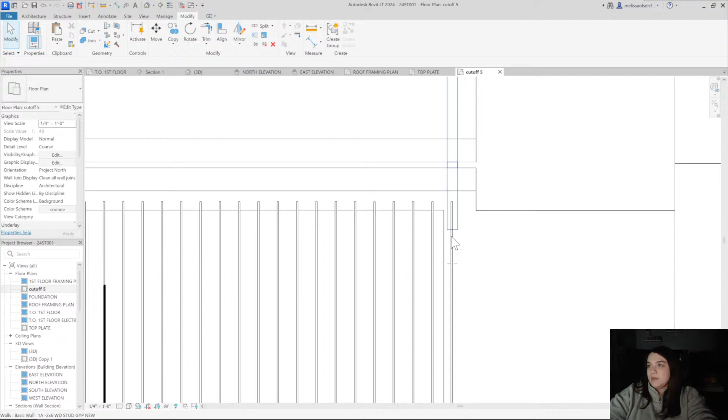So now I can see I want this to be, I'm going to select similar so I can select them all. And then I'm just going to move this over a few inches because I didn't want it to be uneven on one side. So that looks good. They do look a little tall right now, I won't lie.

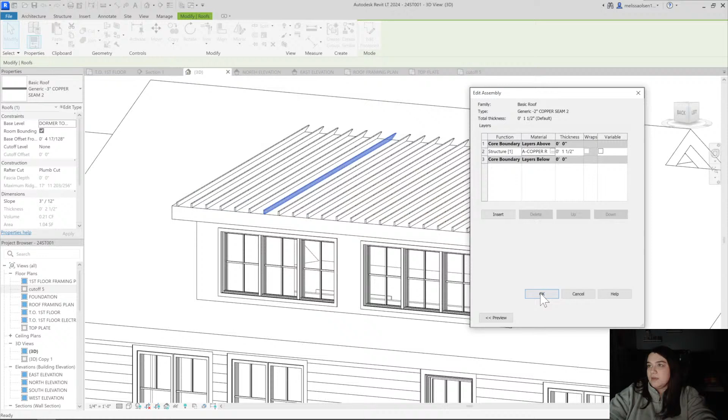So I'm going to go in here. I'm going to rename this, I don't know, 2 inches. It's 2.5 inches right now. I'm going to make it 1.5. I'm also going to take away this copper. The copper right now has this vertical pattern associated to it, so I'm just going to change this to be no pattern. That looks better. The height of them doesn't look as intrusive.

And then I feel like I should just add a piece of trim here because it's looking a little sad. So do I want to do 2x12 or 1x8? Yeah, okay. Let's do 2x12. And then I'll just put one all around here. And then I'm going to do another and go back into it. Pick fascia again. Pick the 1x8 now. And now I'm going to place this right on top.

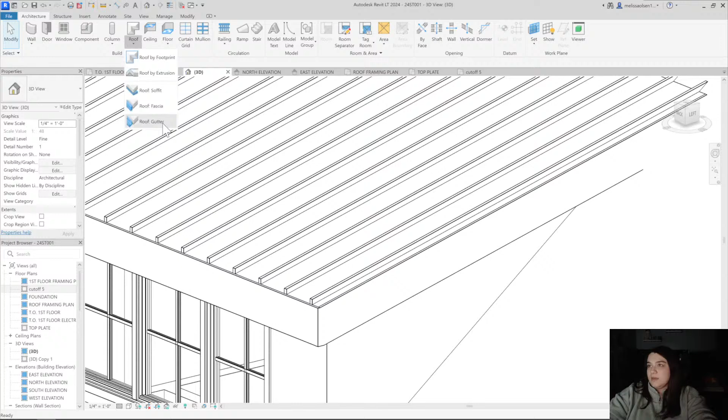So where I created these together, it did not automatically link them. So I'm actually just going to create them separate on top. So this was all created in one command, so I'll move it all at once. When you reactivate the fascia and you go back into it, it basically creates a separate entity. So I'm going to escape out and create another fascia and put it here. So now they're not connected, they're separate.

And I'm just going to move this one out and move this one out and I'm going to join them with the join tool and it should clean up. Elements do not intersect. Yeah, I guess. Kind of hard to see from this angle. See, so now they're joined. It does look a little wonky, but

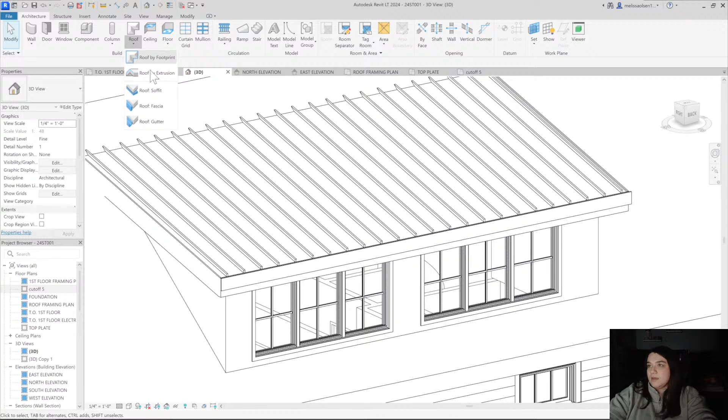we'll just leave that unjoined for now, and I'll just bring this in front because it's being a pain in my butt, it knows my phone's about to die, and I'm on a time crunch trying to get this fascia on. Alright. I'm just going to pull it in front. And there we go. Let there be detailing. I also think this maybe doesn't need to be a foot overhung on the sides. I don't really like the way it's looking. I don't like what it's giving.

Alright, my phone's on 2%. We're on 2%, people.

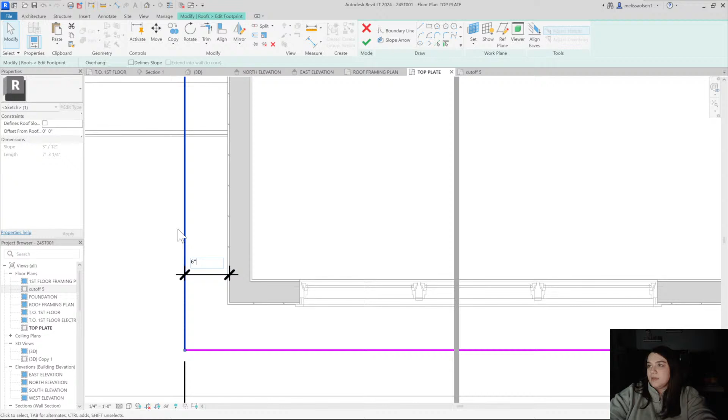I don't think this is a foot. What is this? A foot. Okay. Let's just do 6 inches, because a foot feels a little bit too much for this. So I'm just going to move this all in 6 inches.

We're going to make it before my phone dies, guys. We're going to make it. We're going to finish this little area. And then I'm going to close it out.

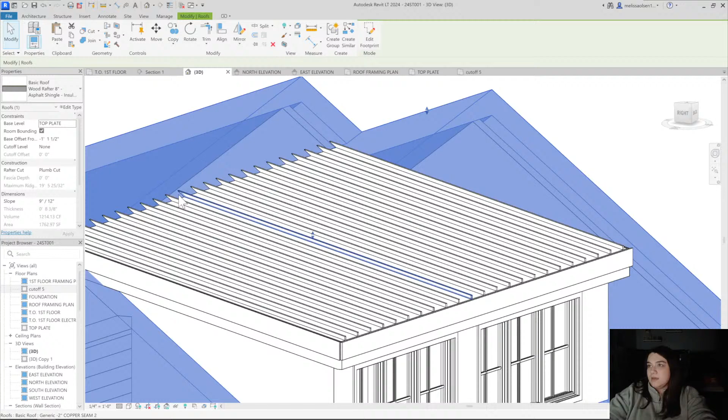Alright. So my roof up top, obviously, these are now kind of messed up. But that's okay. So select similar, visible in view, and let's just move you over. Alright, so that looks good. So they didn't move completely because my roof changed. So I'm just going to select all instances, visible in view. I'm going to move them all at the same time. It's no big deal. Move this here. And they'll automatically just clean up into this roof because they're all connected. And now it looks great.

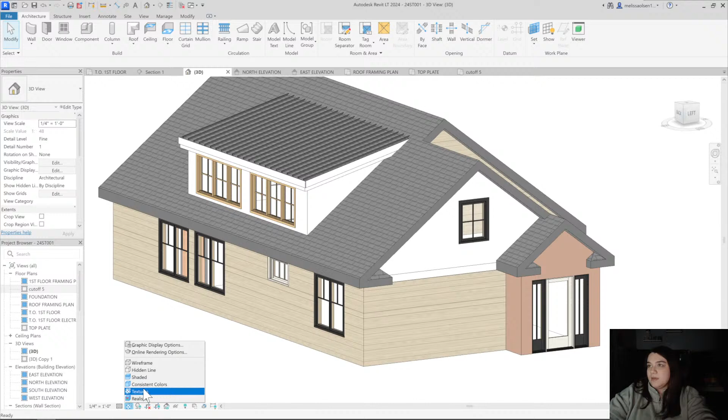Alright. Well, I'm happy with how this is looking. I feel like I need some color though. Oh, it's looking cute. The colors are a little bit wonky, but I'm gonna add some shadows, give it some depth. Looking cute. Probably gonna turn the shadows off. Consistent colors, textures. What's textures? Ooh. Okay. Textures is definitely interesting. We're gonna go back to consistent colors. Shaded. Alright.